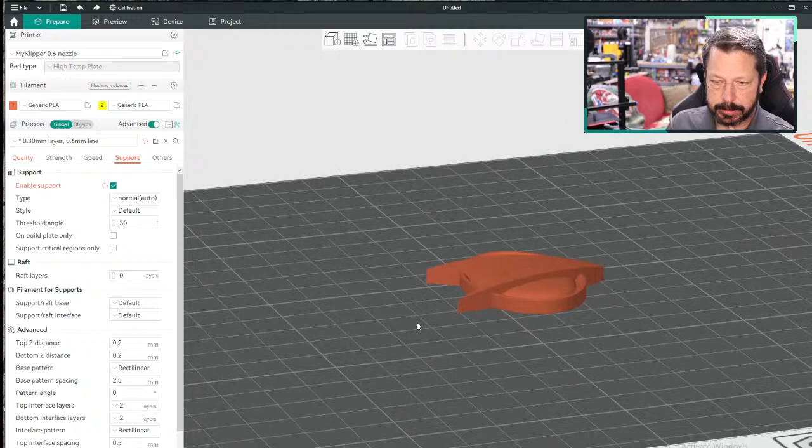Now you need the safety equipment - I've got some safety glasses over here, I have some leather gloves, although we're going to be really low temp so that'll be okay, but I'm going to still use the leather gloves, and we're going to cast something. So let's look at what we're going to do. I found this on Thingiverse, the Star Trek: The Next Generation Communicator.

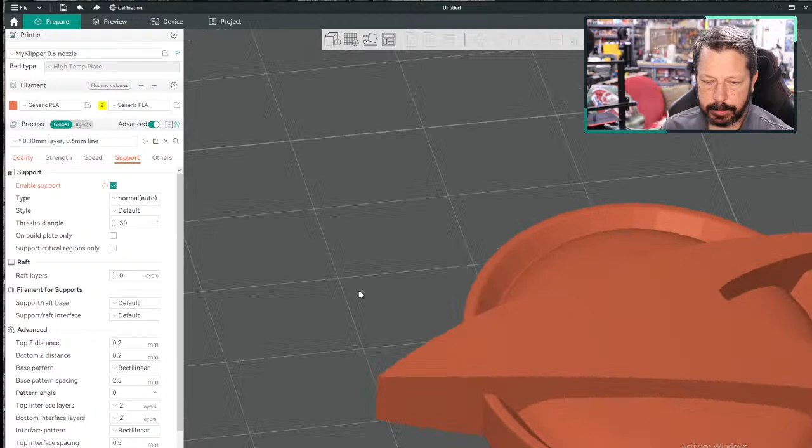Since we're doing an open pour, that means a couple of things - I'm limited on the shape of the object, and this one fits most of those. Now this one doesn't have draft on this edge right here, or this edge, there's no draft on that. Draft is - well, there's no draft on the edge here either, so this is not ideal for casting like this. But what draft is, these sides would be angled, tapered to where when I put it in the mold and pack the sand all around it, and I go to take this part out and leave the cavity that it makes, there would be an easy release from that.

If there are vertical walls, the sand's going to want to stick to this, and it's going to pull chunks out, and we probably won't get a super clean release from our part. We're going to put some release agent on it, cornstarch, to help pull it out without pulling our mold apart.

But a better thing would be if this part had draft on it, so it had like 2 or 3 degrees of draft on all these edges, so they weren't vertical straight up and down. We'll be able to create a mold.

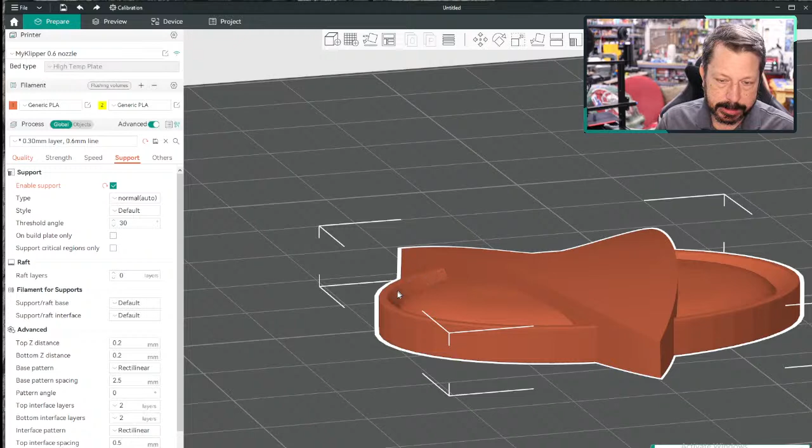We might see how this inner part is tapered in. This is a lot of draft, but this is one of the features of the part actually. That would be draft if it was just a little bit, just 3 degrees or so. This one, you know, like 45 degrees.

So vertical edges are not that friendly for sand casting. Overhangs are not possible for an open pour.

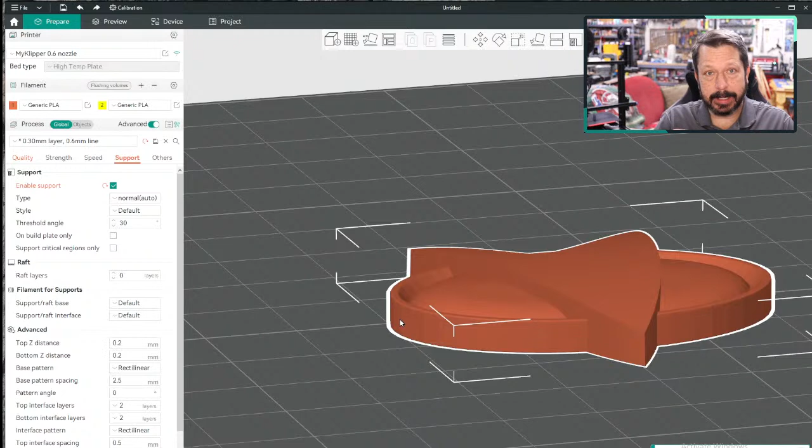So if you want overhangs, like a part that once I pack sand around it, I can't get my master out of there. I can't pull it out without tearing apart the mold. Then I've got to do a multi-part mold or a 2-part thing. I've got to have cores and all this other stuff. It gets way more complicated.

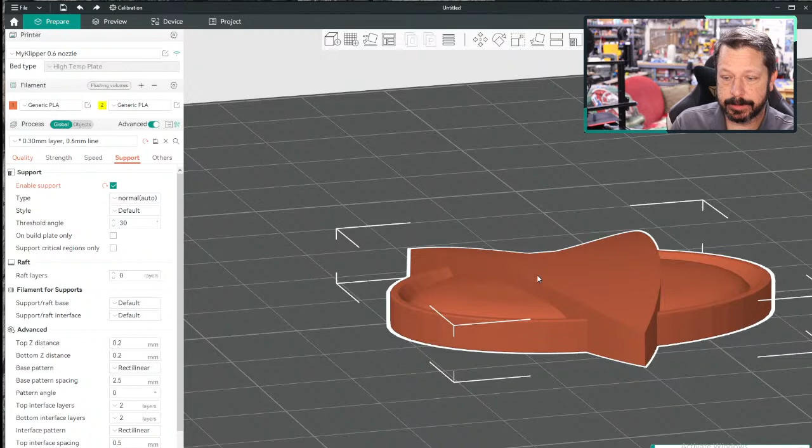Or I have to do that lost PLA, lost wax type casting where I just encase the whole thing and then burn away the master. This one, the master will be reusable if we wanted to make more of these. If I were going to make these for real, I would create this with more draft on it so that it was easier to remove.

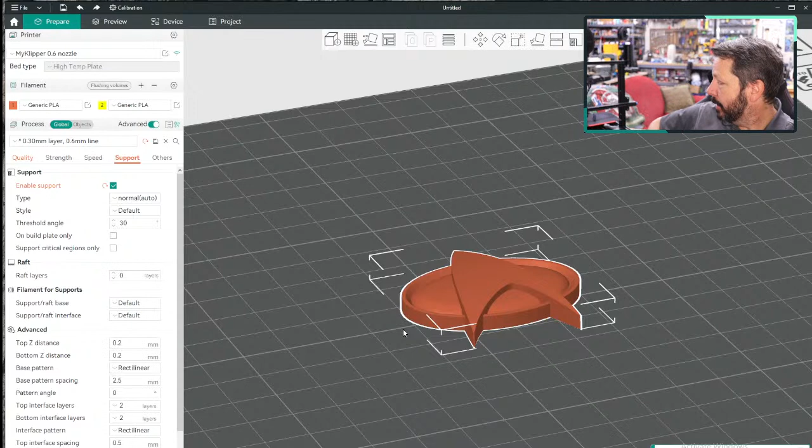Now I have to think about, since it's printed, I'm not going to do any post-processing on this. It's just a demo of how the process works. We're not trying to make fancy stuff. But I would want to clean this part up after it's printed and make it as smooth as possible, get rid of the layer lines and all that kind of stuff. We're not going to do any of that.

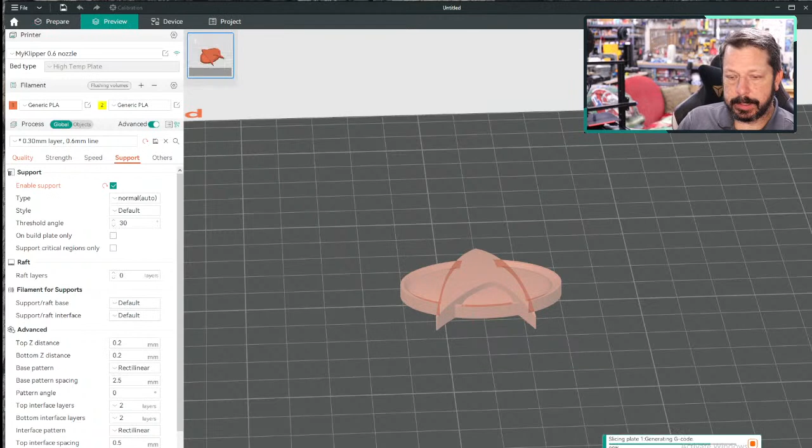What I did is, instead of printing it flat like this, which would be okay, the downside would be, let's slice it real quick and see how the layers are pretty obvious. Yeah, and I'm at 0.3.

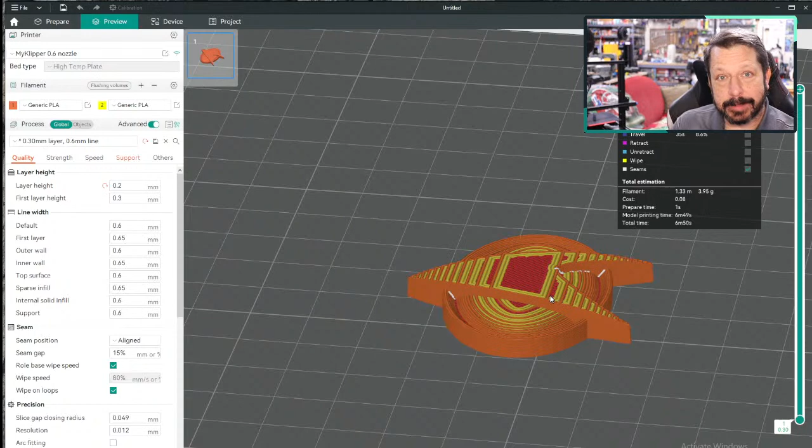I can't go much below 0.2 millimeters. Pretty sure I'm on 0.2 millimeter layer height. Yeah, 0.2 millimeter layer height. I can't go much below that because I've got the larger diameter nozzle on there, so I'm kind of stuck at 0.2 being about the thinnest layer I can do.

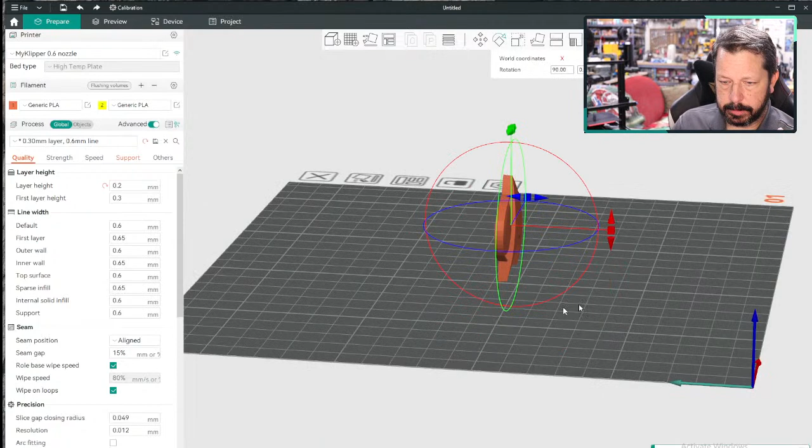And this just wouldn't look that great unless I wanted it to look 3D printed. So instead, what I did to get rid of that is I turned it up on its edge. Something like that, and then I think I had it, let's see, it's still on the printer. I had it kind of like that.

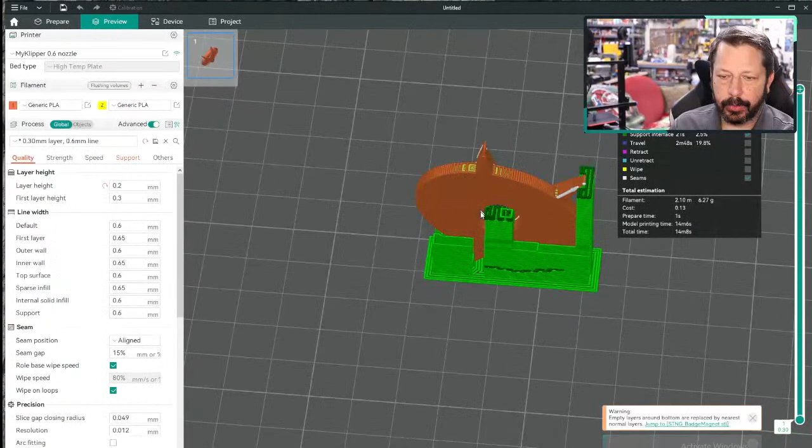So I had to have some support in there, but what this will do is now the layers going across here will resolve the detail a lot cleaner. So I did have this support. It does have a hole for a magnet in the back, I'm not really concerned with that part. But now you can see I've got a much smoother surface, and I do have this kind of stair step on the bottom here, but that's just the way it is.

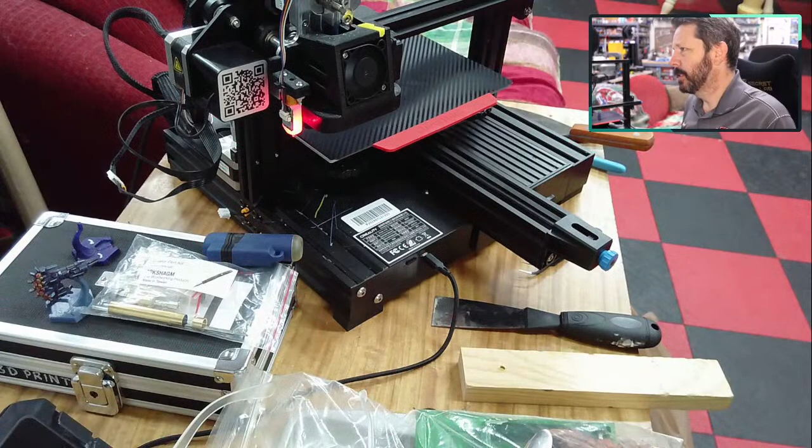So let's look at what I printed. It's still on the printer. Here, well, it's over here. See if we can pull it forward.

So here's what I have. Let's see if we can get this off of here. I'll probably move the printer out of the way because we've got a bunch of stuff down here. So there's our thing. Now, a couple of things.

Let's see if we can get the support off. I haven't actually, this is the Orca slicer support, which is Prusa slicer support. I haven't tuned it at all, so we might have some issues getting it off of there. Let's see. Yeah, it's actually kind of stuck. A little too much. Let me work on that for a second.

So it will come off, but the gap between our model and our support's a little too tight, I think, and it's not coming off of there very easily. And that's a thing I didn't even think about, because my other slicers, their supports have been tuned to where they work a little better. Didn't think about this one having not been tuned.

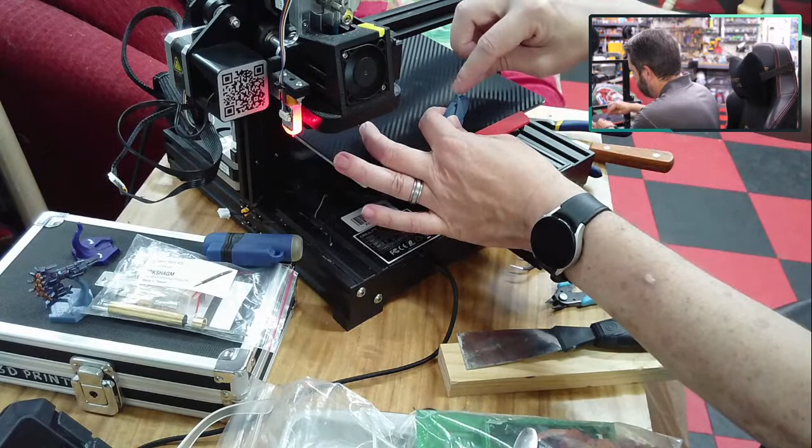So we would need to clean that up. This is pretty jagged down here. The top pieces up here are a little melted, so it was not cooling well. With it printing like this, the last few layers were just sitting right here on top of this peak, and they did not print very well. That's going to be true when you have a small piece at the top of your print.

A couple things you can do to mitigate that: there are some minimum layer time settings you can try, to make sure it doesn't just sit there on top of the layer, and slows down to give cooling time. So you can try that.

What I usually do that works best, if feasible, is build in a sacrificial part, or print two of them - one here and one here - so the nozzle prints on this one, then moves and prints over here while this one's cooling. That's one way to get those thin pieces to work.

Another thing you can do is make sure your part layer cooling is up to par. Or if you don't want to print two of these because it's too much material, print another column somewhere so the nozzle has to move away from this one, let it cool, go do something else, then come back and work on this one. Otherwise you'll get these edges up here.

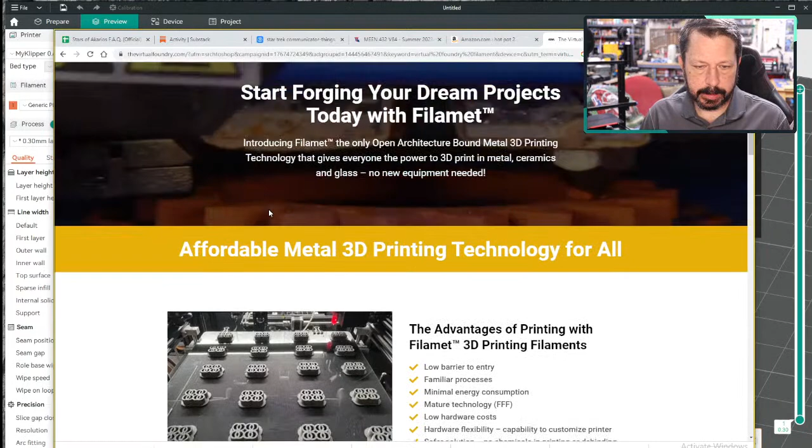These are 3D printing, FDM 3D printing materials that are very high metal content. So we have some of it at school. We have not printed successfully. The problem we're having with it is actually heat creep.

Normally your hot end has a hot side and a cold side—the cold side is kept cold by the heat sink and the fan that blows across it. The problem with this stuff is that the filament itself has such a high metal content, like 80%, and it's conducting heat through the filament, so we're getting heat creep clogs. We haven't gotten a good print of it yet. We basically have this kit over here, and the idea is that you print your part like this. It can work, we just haven't gotten it tuned on the right printer to do it.

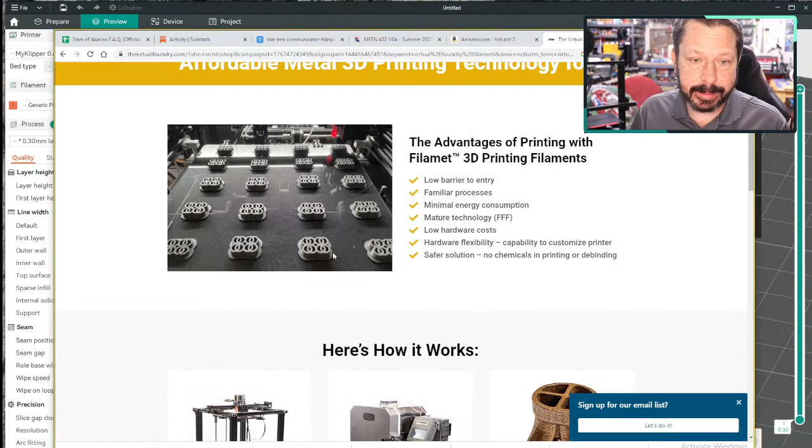They're using something that looks similar to a Creality—what's that, the 5? Something, that style of printer.

And then you have to burn out the rest of that plastic so that it becomes metal. So it does shrink, it shrinks 20-something percent. And then you end up with a solid metal part that you FDM printed. You just had to process it in between the solid metal and the printed part.

And assuming you can do that, then you can make solid metal printed parts that take advantage of the ability to 3D print. So now you do have these really complex geometries. You're not limited to what we just did, where it's a one-sided pour kind of thing. I don't remember what the cost of these things was, $200, $300. I don't remember. The filament's really expensive. The kit, the starter kit's not terrible, but it's not cheap either. It's not something you'd want to just play around with.